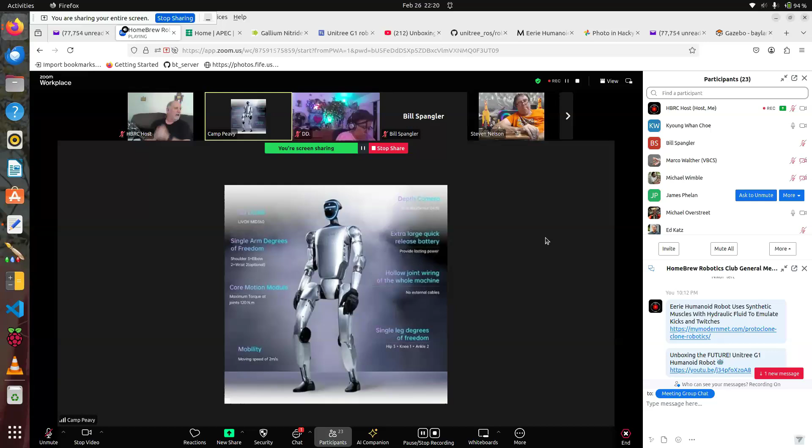All right, what else? What other club news do we have this evening? Yeah, they don't. Hey Stephen. Okay, let's see what's next.

I think you just gave me a good idea there, Cam. What's that? How about BattleBots, but with sort of replaceable shielding and body parts and stuff like that. So basically an inexpensive version, same kind of idea but without all the cost.

Did that? Well, I figured out with BattleBots, getting robots to interact with each other is difficult. The easiest thing to do if you're going to have a contest where robots interact is just have them try to smash the hell out of each other. But even then, and I don't mean to dismiss it, BattleBots is radio control, so there is that. But anyways, we won't have that argument here, because normally the argument for how to make it cheaper is just smaller.

Yeah, that's a good point. The majority of the cost of hosting RoboGames was the combat arena for the most part, wasn't it? The insurance because of all the combat robots, right? Yes, it was. But the combat bots was what drew the crowd. Yeah. But my point is, if we had a Nerf version of that, most of that would go away.

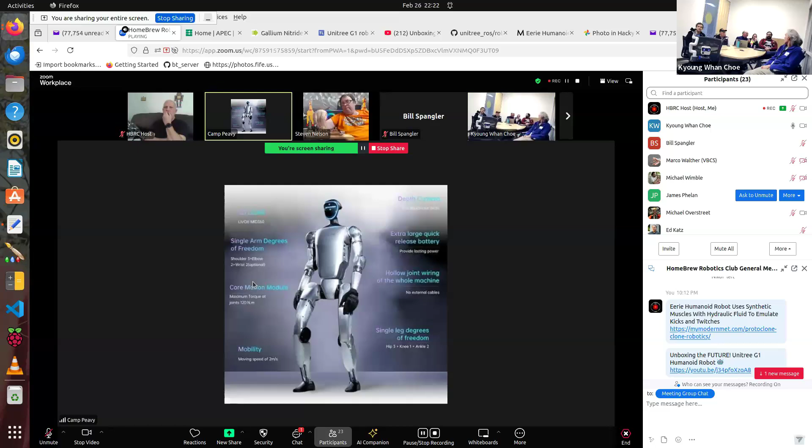There's actually, well, okay, a Nerf version of the big ones. Sure. One of the competitions I really enjoyed watching at RoboGames the last years was, I think the group hosting it was from Arizona, but they were doing like biped mech warrior combat, and it's all airsoft guns. So they don't actually break each other. Yeah, paintballs. Yeah, sure, larger size paintball. That was actually pretty cool with the first-person views and all the things they had going on with that.

It was really cool. And then basically the event organizer provides the target pads to handle the scoring. They mount the destructible combat targets all over the robot, and that's what scores the system. And then the only thing explicitly defined is a radio link to say 'you are destroyed, shut down. You are destroyed.'

Well, it was some kind of miniature city street, wasn't it? Yeah, it was like a town. Yeah, a little cityscape. You basically get bonus points for actually being a humanoid, versus you're allowed to be either a quadruped or a humanoid, and I think you get some kind of multiplier for only having 2 legs. And then you just see the ones that are quite, they just walk up and push over the humanoid.

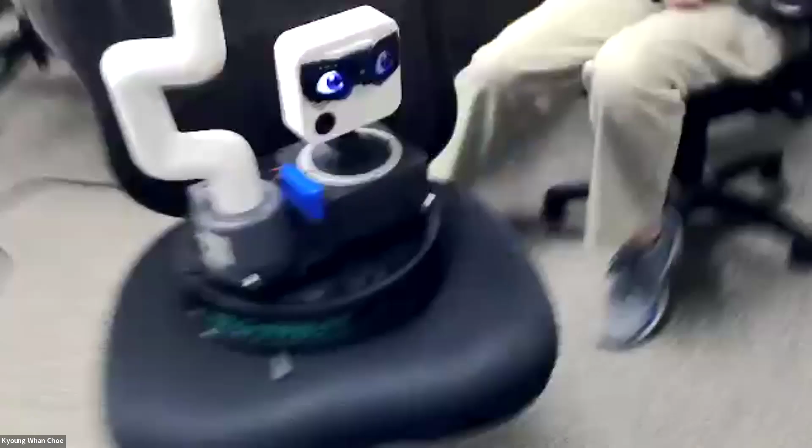This is the front. Yeah, so it's a HackerBot with everything on it - head, Raspberry Pi here, and the Elephant myCobot arm with a custom gripper made by Hackerbot Industries.

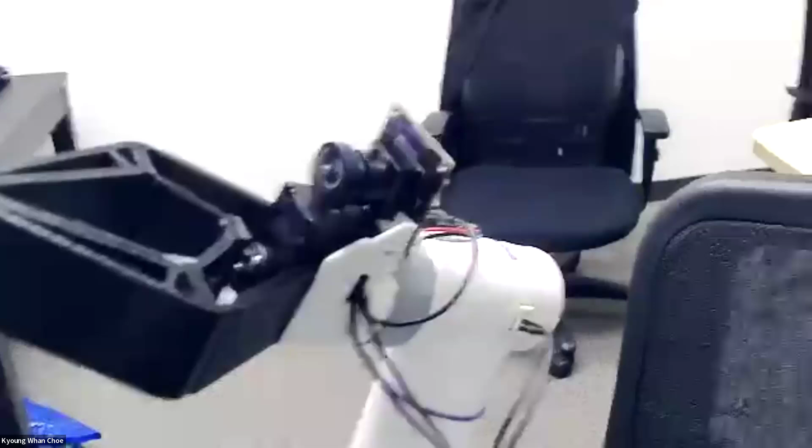I just put together the gripper yesterday, so right now I only tried sending commands through serial, which they have, but there's no middleware yet like ROS and others. So it's pretty much bare bones, but the components seem to be working, except for a few UX problems like powering off and so forth. But it's pretty interesting in a way - it moves, has LiDAR, has mapping, and can dock.

So does that have the AI hat? It does not. Is it a Raspberry Pi 5 in there? Yeah, it's a Raspberry Pi inside. Is it a Raspberry Pi 5? Yes. Okay, and you're running Raspbian?

The default one, I guess - probably Raspbian. And I also suggested to Ian that it would be good to try a Jetson, like Orin Super. Then, because now ROS is also taking advantage of CUDA and so forth, probably a lot of the recent new GPU-accelerated ROS packages can be easily used.

So that's got a shelf on it, doesn't it? Put the camera where the LiDAR is so we can see the LiDAR. Yeah, make it okay. So you've got a shelf on there, raised up a bit, so you could put things on that shelf and it doesn't impede the LiDAR.

You know, iRobot seems to have stopped selling the Create 3. And the BotVac's getting long in the tooth, although you can still get those through eBay for like 150 bucks refurbished. But this guy, with that little shelf on it, is nice because it doesn't block the LiDAR. Yeah, really excited about Rossifying this thing.

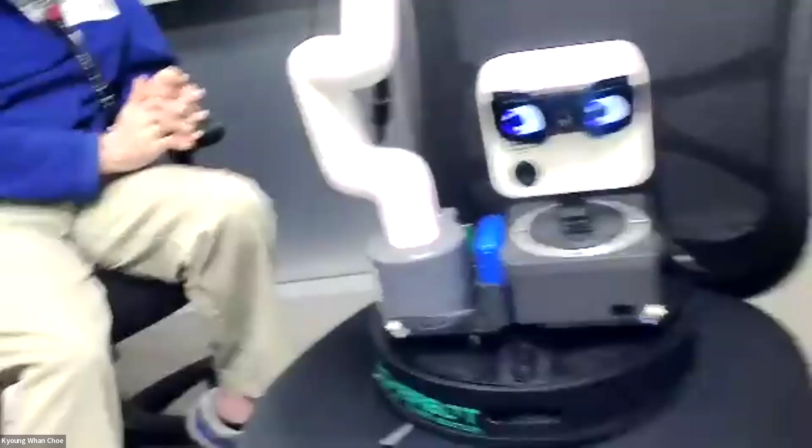Those eyes are very cute. That is still vacuum, yes. So my son tried to put this on, and you see this like the feet, and I said hell no, because then it will get dirty.

Technically the vacuum base, the HackerBot guys did not touch, because anything you modify on an existing vacuum adds cost. So that's a working vacuum, the cheapest one with a lot of sensors and all the software already. Having worked at Neato for 13 years, I can tell you it's actually a damn good robot vacuum cleaner. Just saying.

I thought if you don't vacuum, the battery can last for 10 hours ish. Because when vacuuming with all the motors on, it can only vacuum for an hour or two. Without that heavy duty work, it will last much longer. So that's actually a very good base to begin with, and if you put nice things on top like a Raspberry Pi or a Jetson, and then arms, that's a pretty good mobile base.

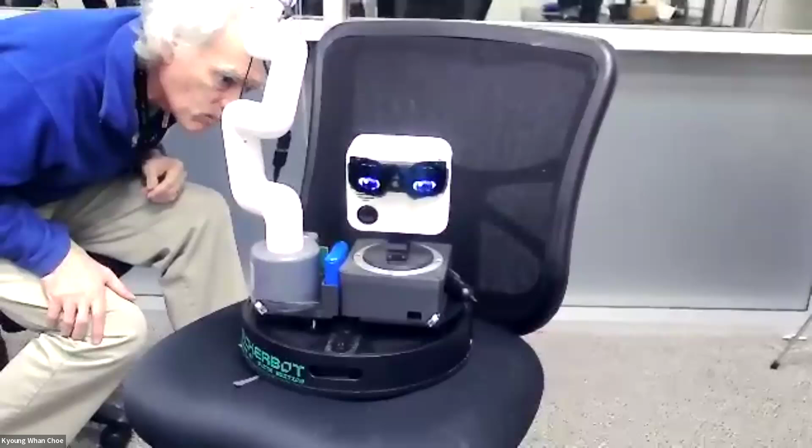What I've observed is there are Arduino and AI guys, a lot of AI going on there, which is interesting because I think there should be some kind of crossover between ROS and AI. That's where a Jetson Orin Nano can add many interesting things as well, and it can also fit in this space - the form factor is almost the same as a Raspberry Pi.

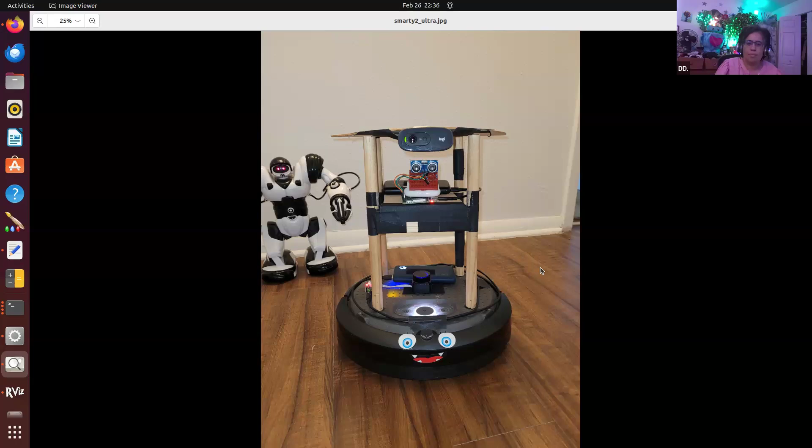All right, this is Smarty 2, part of the Smarty gang, based on the Create 3, LD06 LiDAR, Logitech C270 camera, and a homebrewed ultrasonic sensor. Thanks to Mike Wimble and Ralph Ganock.

So here I've got the robot located in the hallway. I shall attempt the Floorbot Challenge Phase 1. I'm going to do it with waypoints, so let me set some waypoints. Phase 1 of the Floorbot Challenge is to go from one end of the room to the other and back. Phase 2 is to identify an object in the room, and phase 3 is to fetch the object. I think we've had 2 or 3 people do phase 3.

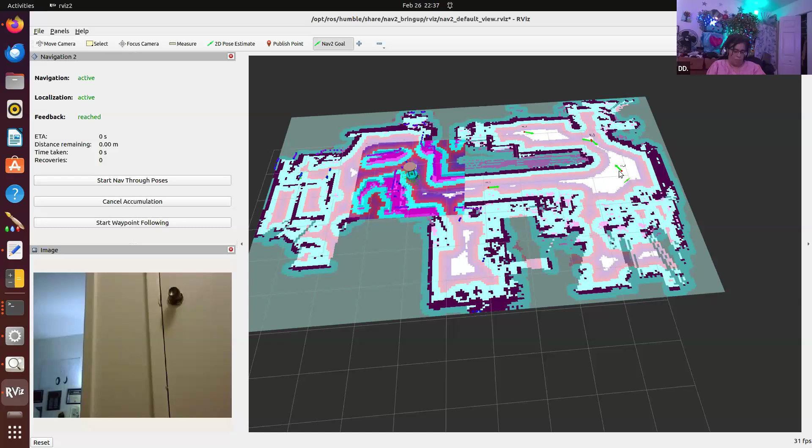Patrick Goebel, among others. So let me put these breadcrumbs here, and with any luck the robot shall navigate from one end of the room to the other.

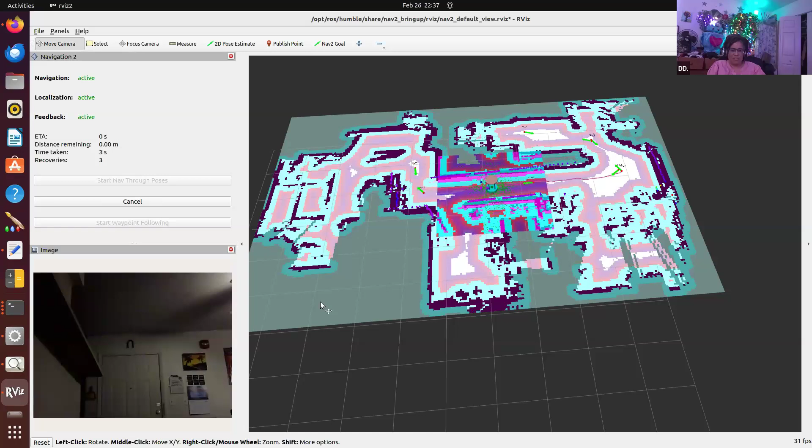So exciting. This is some stuff that we do at the ROS discussion group. If you're interested in ROS, expert or beginner, join in. This is the standard framework for robotics - there is no learning curve, it's a learning cliff.

So this is the ROS visualizer here, the robot's navigating around. This is a MockBot URDF, Unified Robot Description Format, that we've created. Some of us are working on a book called MockBot - we're building the TurtleBot, Mock TurtleBot, 27 different ways, with like 3 different bases, 3 different LiDARs, and 3 different cameras. We're trying to beat Mike Wimble in publishing our book - that's our goal.

So you're saying it's as easy as falling off a cliff, huh? Yeah, it's that easy, it's just that easy. So here he comes, he's on his way back now. It's kind of exciting, this is navigating.

Oh, the thing here is this is actually running off my phone network. So I have my phone set up as a hotspot and I'm doing this. That way I'm able to do remote demos.

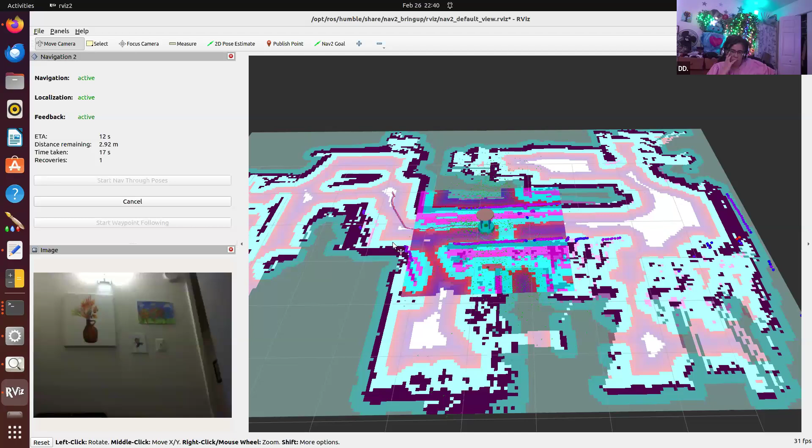Let me reset that endpoint. So that wasn't a complete phase 1, but let's at least let him get home. Yeah, so I've got this one running off of the phone network, and I've got my bot vac running off of the Wi-Fi. And I'll be cobbling together the Roomba using Sergey's code and Ross Lunin documentation. So there he goes. He's at his home now.

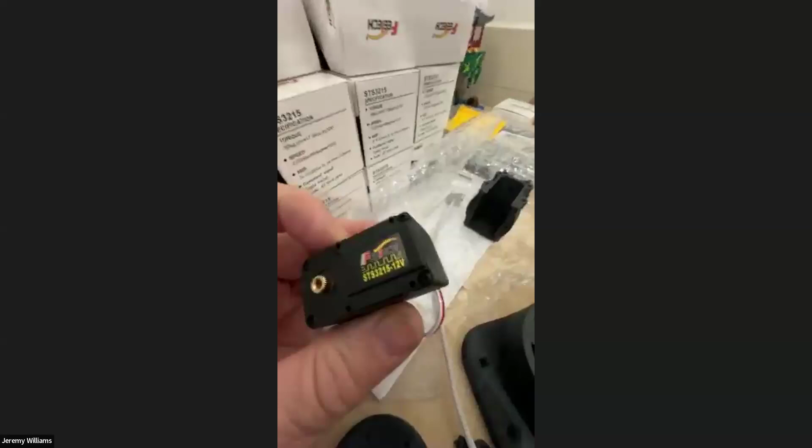It comes with some pretty nice aluminum servo wheels, and most servos have a range of motion. For those of you who are familiar with this, sorry if I'm boring you, but for those that don't, it's actually pretty cool. Most servo motors, as you know, have a range of motion, like, I don't know, 135 degrees or 270 or whatever. This one is a little bit different, a little bit unique. On the box I really should take one of these apart for you guys, but anyway, on the box it kind of shows it.

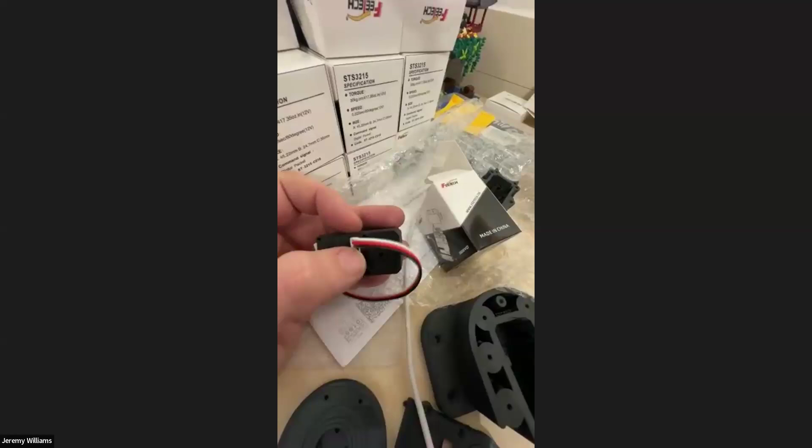What makes this unique is, first of all, it's daisy chainable. So you've got connectors on here where you can connect the signal in. You've got your power and then your signal, so 3 wires, and you can daisy chain it and keep on going. You can do 253 of these.

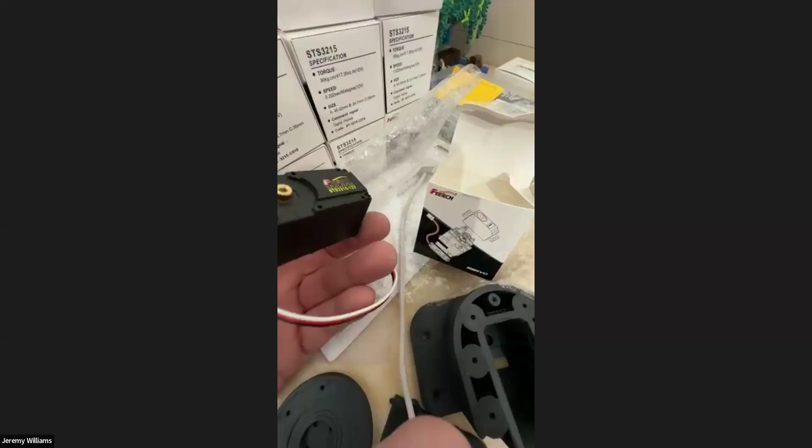I'm sorry Jeremy, are these Dynamixels? Are these Dynamixel servos? These are, if you want to get the brand name, they're Feetech, made by a couple companies I know of. Yeah, I hate to interrupt, but those are actually ripoffs of Robotis servos. Yeah, there's a lot of stuff in China that's a ripoff of a ripoff of a ripoff. So I'm not vouching for necessarily the company, I'm just vouching for the kind of servo it is.

So these will actually rotate, as some of you probably already know, completely 360 degrees. It can also give feedback as far as voltage drop and position. Or are you giving it serial commands? Yeah, and there's actually a little magnet inside and a magnetometer for feedback of position.

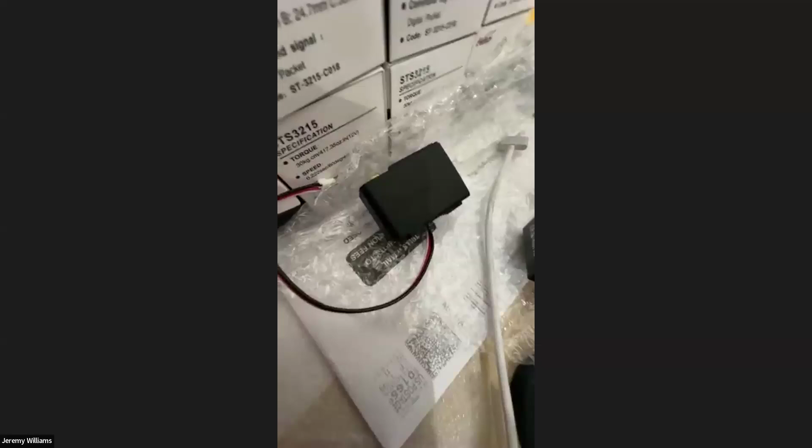So that was the one thing that I thought was really cool, is that for the price point - what did these cost us? I think they cost us about $15 US. Yeah, you probably have to buy 50 at a time, don't you? How did you guess? I know those guys. So we bought about 40 of them. I've got some of their kits too, and what I liked is they've got a little electronic speed control for servos that does the PWM thing. It's like $10, really cheap.

Yeah, and the best part is the fact that you can daisy chain them, so you don't have a whole stack of wires coming in at the bottom. But anyway, I just thought I'd mention that if you haven't seen them. Yeah, I need to replace some of my Darwin servos, they're pretty versatile. Anyway, that's all I got for you. Very cool, thank you, Jeremy.

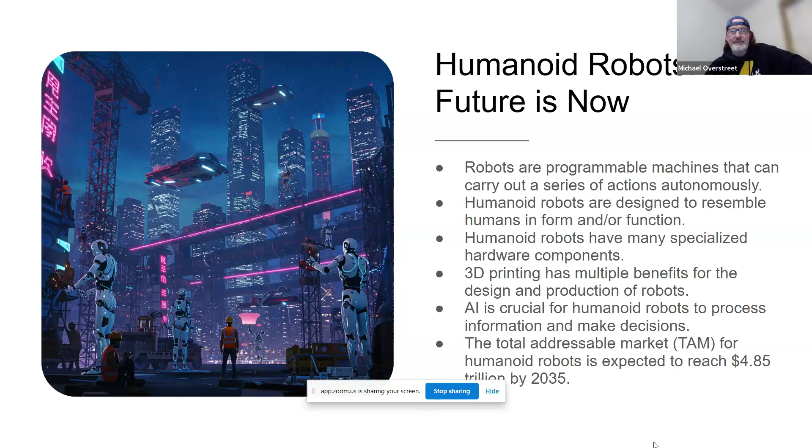Okay, so one of the cool things that RoboGames did for me was that I was able to meet lots of people throughout the world who were really interested in robotics, especially humanoid robots. So one of the cool advantages that RoboGames provided me is I could visit friends throughout the world and check out what they're doing in the field of robotics and so on.

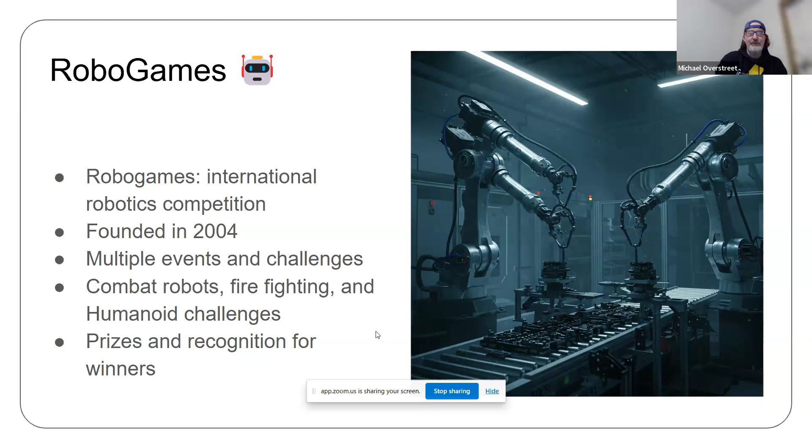So RoboGames, like I said, that got me started back in 2004, 2005, mainly humanoids. Most people, I think, in this group have been to or know a lot about RoboGames, so we don't have to really go into too much detail about RoboGames.

Now, most people, when they think about RoboGames, they think about this. They think about BattleBots. BattleBots is what everybody showed up to see. So,

Just a quick side note, in a lot of ways it is kind of a failure on my part because I'm a huge advocate for humanoid robots, and I was never able to get humanoid robots to be big, especially in the U.S. If you go to places like Japan, especially South Korea, and even some places in China, you've got a big event called Robo-One, and it's huge and very popular. And unfortunately, that never really happened at RoboGames. I think pretty much since 2005, it's been me and maybe 1 or 2 other people in the U.S. So with humanoid robots getting so big now, it's unfortunate that we don't have an event in the U.S. to participate in.

So I'm sure there was humanoid soccer too. Yes, there's all kinds of cool things we did with humanoid robots - humanoid soccer, kung fu. We had a lot of autonomous events: basketball, soccer, kick a soccer ball, shoot a basketball, dash, you name it. We had lots of really cool humanoid events, both autonomous and RC. Of course, kung fu - everybody loved kung fu, especially with the big 5 kilogram and higher robots, weight classes. But like I said, it's partially a failing on my part because I was heavily involved in humanoid robots at RoboGames, and we just never could get that exposure.

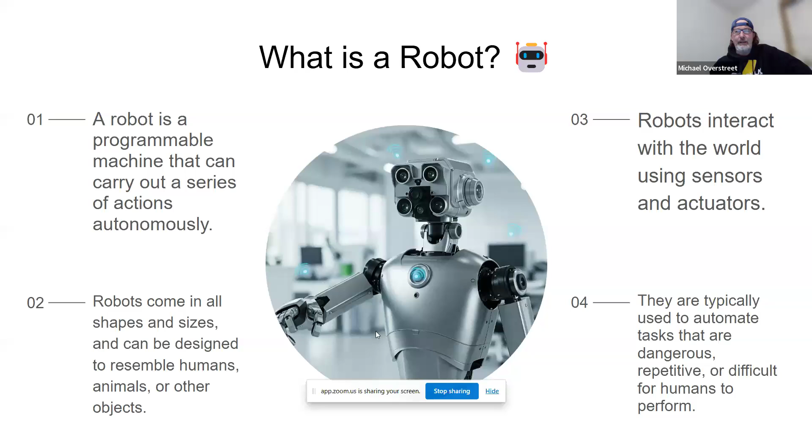So humanoid robots, it's kind of both those very strict as far as 2 legs and 2 arms. People say 2 legs, 2 arms, just looks just like us. But you can tell nowadays there's all kinds of variations on the human form, very similar, but just slight variations.

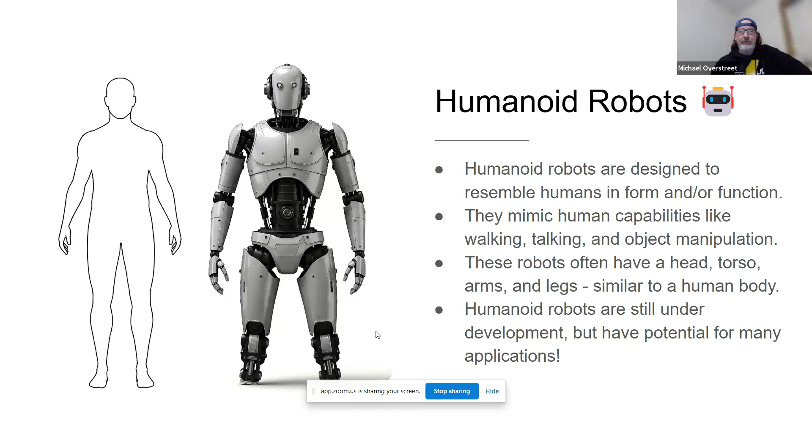And of course, everybody seems to be trying to develop a humanoid robot right now. I think the big point of my talk tonight is that as humanoid robots have been becoming more and more popular, everybody seems to be wanting to develop one. I remember my first RoboGames in 2005, and I had multiple conversations with people there about the basic argument: is function more important than form, or is form more important than function?

It seems that the debate, especially around 2005, everybody was telling me it's the function, it's what the robot does. You design the robot based on what function or activity, what job you want it to do.

Now it seems that popular opinion has flipped. When I have a conversation with somebody, they automatically assume that the best robot would be one that looks like us, because you need the robot to work and perform jobs in the same environment that we live in. So instead of changing our environment, you make the robot just like us.

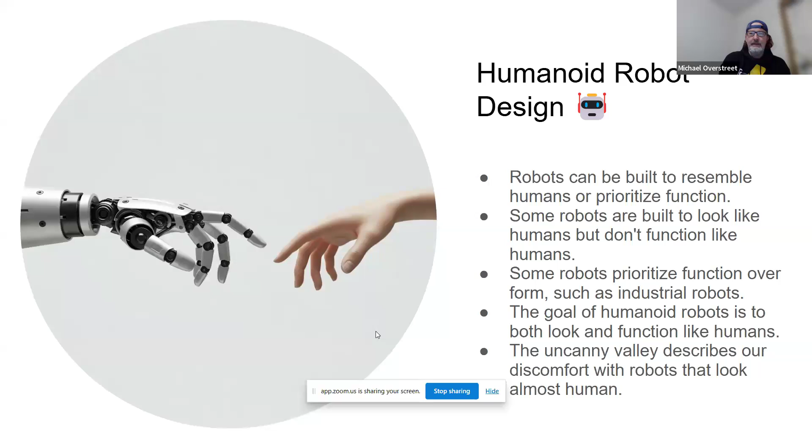I think there should still be some thinking about what is the best design for a situation, because a humanoid robot can be a huge overkill in expense and complexity for a task.

A lot of people think that a biped, which I've experienced, can be very difficult to get to walk and balance. I love Legos, and I have a lot of kids that I teach who love Legos. I just think, how would a bipedal robot walking around on a floor full of Legos, how well is it going to walk? You really don't want a humanoid robot to fall on somebody. So these are design considerations I think people need to think about.

You might think, well, you're supposed to be promoting humanoid robots - but yes, I think we still have to be smart, and we need to look at the applications and what function the robot's going to provide. We need to be efficient and cost effective, is what I'm trying to get at.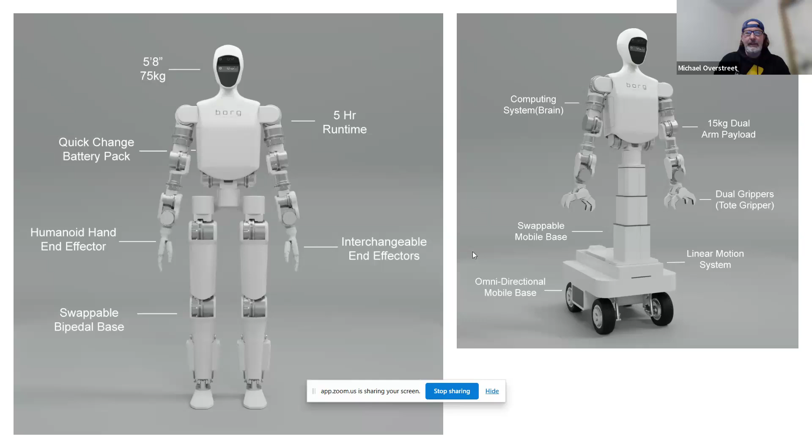I bring up this picture. Everybody should know who this robot is.

I've always thought I should patent this, but I always thought, why limit a humanoid robot to two arms and two hands? I've actually seen some Japanese and Chinese inventors give you an arm attachment to your body, so you have a 3rd or 4th arm. So you shouldn't limit a humanoid robot. Some people would tell me I'm talking blasphemy, but I don't think you should limit a humanoid robot to just 2 arms and 2 hands. There can be added functionality - one humanoid robot could do more than the job of one human being if it had multiple arms and hands. It's just another design consideration.

So the big thing, when Asimo, the Honda robot, came out - it's been years now. I think it's finally been retired about 4 or 5 years ago.

The hardware was the big stumbling block for years and years, figuring out how we can get a robot to balance and walk on two legs and be smooth and natural. So whenever you talk about a humanoid robot, I always like to tell people that actuators are extremely important. Actuators are going to make or break your robot. With a humanoid robot, you need high torque, but you also need some speed, you need that balance. Usually that means you're going to have a very expensive, very complicated, very complex actuator, or you call them servos, actuators, whatever you want to call them. I've heard it called different things.

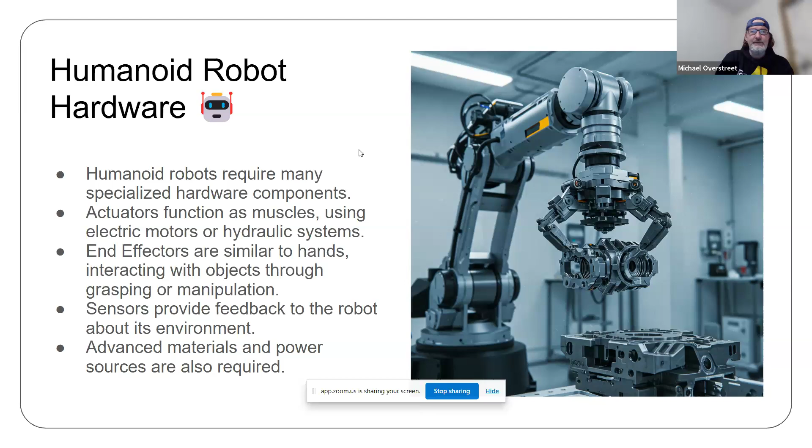Now with the hardware, I still don't think we're quite there yet. One of the most important pieces of the hardware, I mean walking is important, having the legs is important, but one of the most important pieces of hardware is the hands.

Because if the humanoid robot can't pick anything up, can't have some little bit of dexterity... I'm sure everybody's seen the news about humanoid robots in factories and so on. They've got to be able to do something that is a viable job, and since they're in a humanoid environment, they need to pick up tools or pick up objects or press buttons or press levers and do all those kinds of stuff.

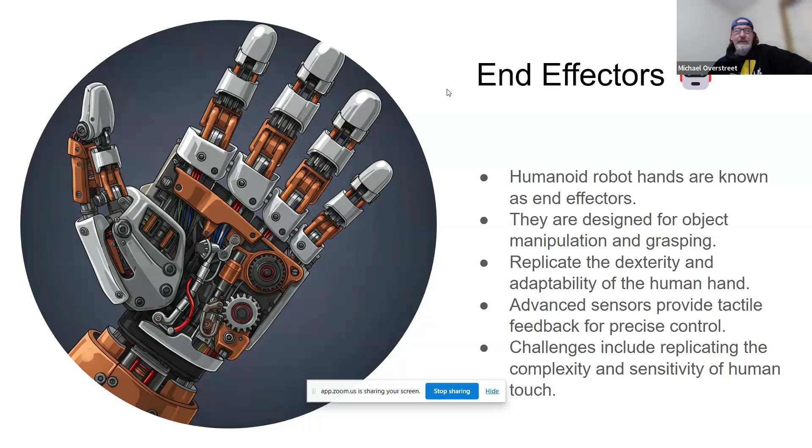You're going to need a very effective hand. I know there's been a lot of work and development in the last 20, 30 years on that. I think we're getting very close to having very dexterous, very agile hands, but I still think there's going to be a lot of work yet to do on that. We'll see how that comes in the future.

I'm not really going to single out one robot or one robot company because there's so many. Of course, everybody knows Tesla, and Tesla's developing and working on their Optimus robot. They've got a third generation hand. I'm not 100% sure this is the third generation, but it's very close to being their third generation. If you look at the fingers themselves, they have force feedback sensors in there.

One of the cool things about being a STEM teacher is I get to talk to high school students, and sometimes they come up with some of the most interesting ideas that if you're not thinking outside of the box you wouldn't think about as an engineer. I've had a few of my high school students ask me, do you really need four fingers? I mean, yes, you probably need an opposable thumb if you're trying to pick something up, but do you really need four fingers? Can you get by with three fingers or two fingers? The reason I mention that is because adding fingers is adding cost and complexity to a robot hand.

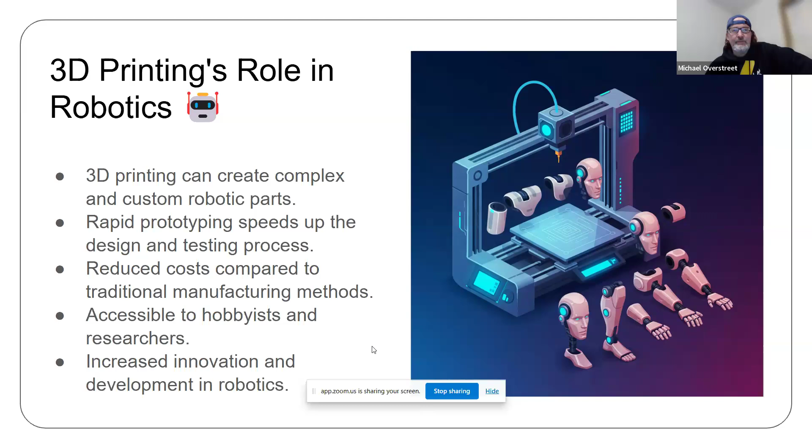Now, batteries. So actuators, I think, are going to be a huge issue for a lot of companies trying to develop a humanoid robot. But I think the next, probably not most important, but one of the 1A, 1B kind of thing is batteries.

So there's a lot of people on social media. You can tell they're not engineers, you can tell they're business people, accountants, futurists, influencers, always talking about how humanoid robots can work 24 hours a day, nonstop. One robot can replace 3 workers because you're going to have 3 shifts, and I just laugh. I don't know if battery technology is that sophisticated right now to have a 24-hour humanoid robot battery. You'd have to have a gigantic battery.

One of the funny stories my students like me to tell is when you watch the Terminator movies, you got Arnold Schwarzenegger running around, beating people up, fighting constantly. I just keep thinking, if that was today, the Terminator robot's batteries would be drained in like 2 or 3 hours. So if you're Kyle Reese, all you have to do is just run faster than the Terminator for about 3 or 4 hours, drain the batteries, and keep the Terminator from charging, and then the movie's all over.

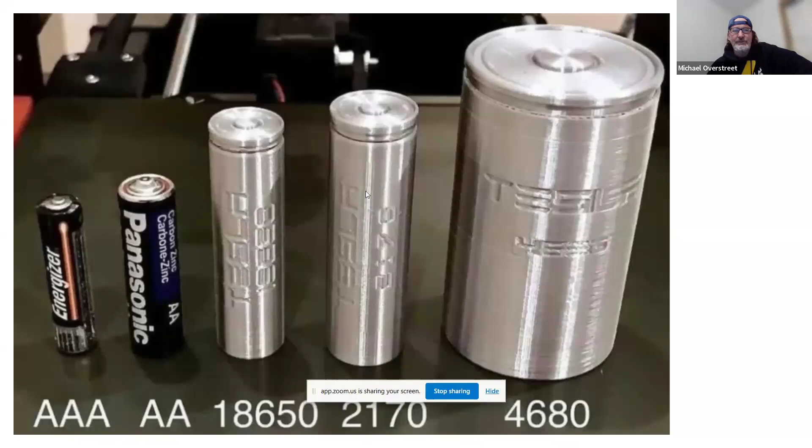So when these business people and influencers are talking about Tesla robots being able to work 8 hours or more, 16, 20 hours a day, I'm like, I need to see that before I believe that. Okay, I'm looking at the battery life, it says about 2 hours. But to your point, is that 2 hours of sitting in a wheelchair or running around?

Doing parkour. Yeah, right. And a lot of people saying they want humanoid robots in the factories to pick up heavy objects and carry them from one station to the next. So the battery's not going to last that long.

So the other thing I keep hearing online, people talk about, oh whoops, how do I go backwards. You'd have to have a charger at your workstation, so they walk to one workstation, plug themselves in, do a couple tasks, then unplug and go to another workstation. You could have the charger in the floor wirelessly.

It's not just a humanoid robot that... hopefully my screen comes back. It's not just a humanoid robot. Oh, God. The robots just put their hands up and get wirelessly charged up.

Well, because if we're talking about needing to put wireless charging pads in the floor, right, you've just broken the principle that they're working in the same environment as you are. Now you've modified the work environment to support the robot. Although it might not be a bad modification. But if you're going to modify it, as Mike said, you've decided to modify, so is the humanoid still the best answer if you're going to modify the environment anyway?

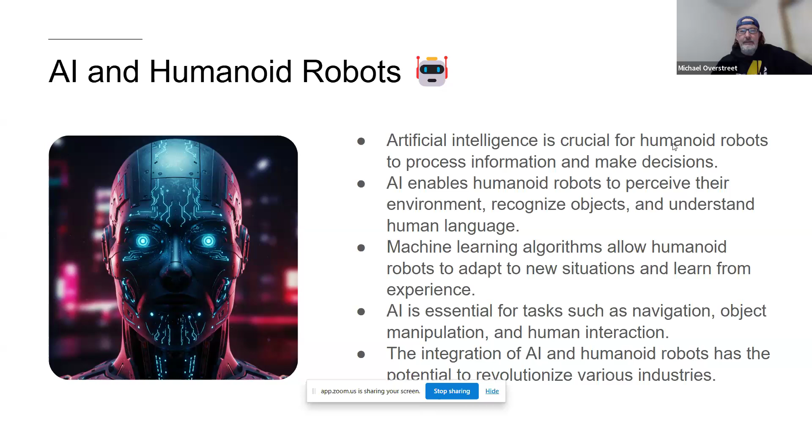So it has a group of basic functions that it can apply to whatever situation you put it in. Right, exactly. Now, but I've also heard that they're having some issues with large language models.

So if you ask a large language model, I need to go to Japan for a maker fair, how do I get there? Sometimes large language models have a hard time breaking all the steps down you need. This is a common reproduced result from the 'LLMs can't plan' genre of papers. They don't do well on repetitive tasks because it's essentially talking to itself over and over again, and that really increases the chance of a hallucination. You have like a 10% chance of a hallucination each step, and then you have 20 steps, or 10 steps, now you have like a 70% chance of hallucination.

For robotics, what people have been looking for is more vision language action models. Right now, one of the state-of-the-art ones that just got open sourced is the physical intelligence model, which is now open, so you can just download it. There's also a new paper called Scaling Laws for Robot Data for Imitation Learning or something of that nature. All those papers show you what the scaling laws are.

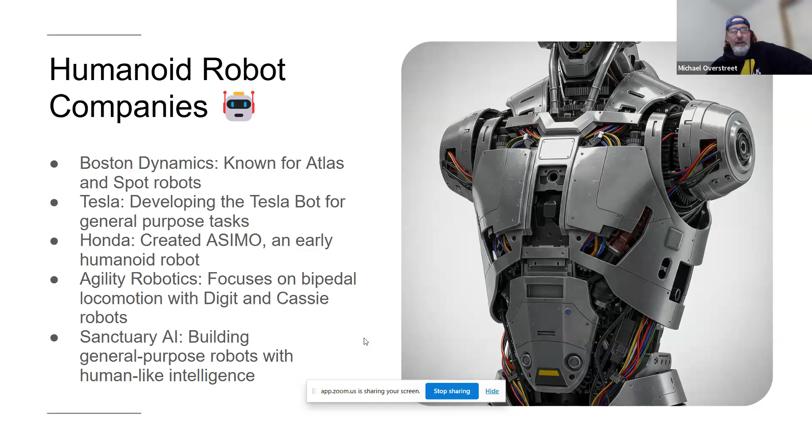I also hear this all the time from influencers, people on YouTube talking about the TAM, a business term for total addressable market. I really don't care about this, but I want to talk about how everybody in the last year or so has been talking about the huge market for humanoid robots. Musk has even said he thinks there will be at least one humanoid robot per person in the world, and some people say eventually there could be 2 or 3 or more humanoid robots for every one person. So I wonder what the car to people ratio is. Who's going to fix all of these things?

You are, Stephen. No, I retired. I'm done. Yeah, I mean...

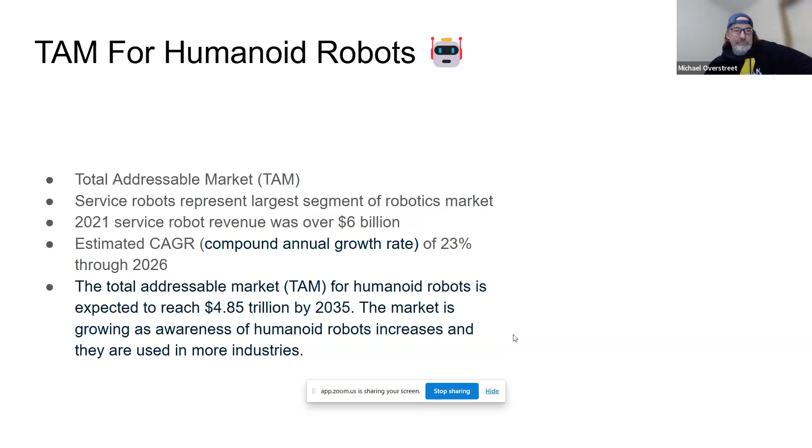There's plenty of people in this world that don't even have electricity, but that's another thing. I just think it's interesting because I keep hearing people say there's going to be 2 or 3 humanoid robots per person, so there'll be billions and companies will be astronomical. In the United States there are 811 cars per 1,000 people. How many of them run? Almost 1-to-1. So there's a possibility that in 10, 15, 20 years from now there could be one humanoid robot per person in the world. I would love to have a humanoid robot butler myself.

And so this is another slide that I just put in for informational purposes.

I heard so many arguments online about how much humanoid robots are going to cost. I know Musk has thrown around the $20,000 cost, and to me that's unbelievable. As an engineer, I don't know how many meetings I've been in where you have the business people and vice presidents talking to a client, and all of a sudden they're throwing out these really low ball costs to do things, and the engineers are just staring at each other going, how are we ever going to do this at that cost? And it's the same with the humanoid robots.

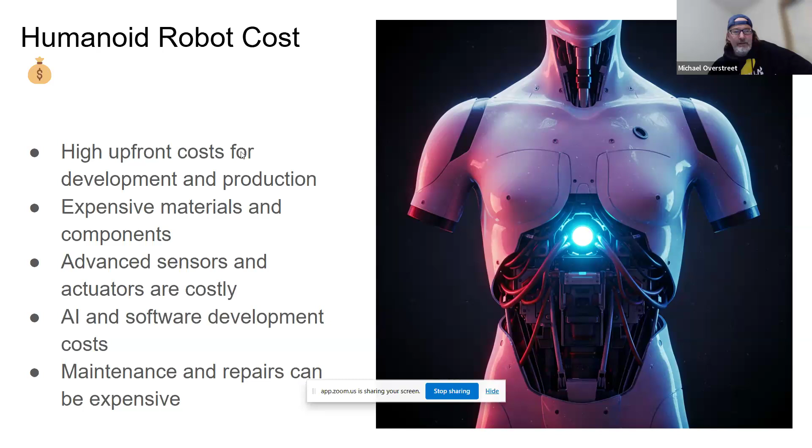So I can send out the link—a couple of investment companies. I'm only including this because it's interesting, but to me this is not as important as some of the other aspects of what a humanoid robot is. But when you try to do a cost breakdown and figure out how much a humanoid robot would cost, I can't even fathom how you could get a $20,000 humanoid robot and sell it and make any money.

I know Unitree—their base simple humanoid robot that Camp had in that video is like 16,000. But that's the base, the simple one without hands. It's 21,000 if you want it delivered.

I wish I had 20,000. We'll bring it to you—write a check for 21,000 and we'll get you one. Actually, you can put as much as you want into these things; that's the beginning model, it's only remote control. The state of the art with the Jetson Nano is like $65,000. That's an expensive Jetson Nano. I mean, it's really easy to make a small fortune in robotics—just start with a large one. That's always been that way.

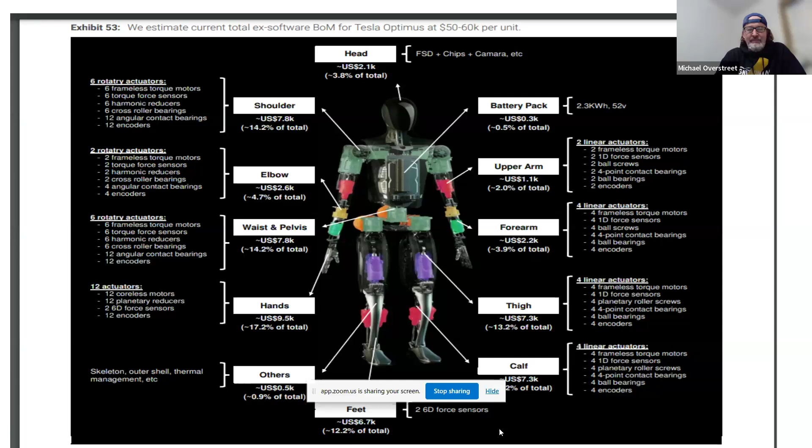The dolls, sorry. Yeah, no, that's fine. We could do a question and answer and talk about stuff.

Kind of wrapping up, I think I only have a few more slides, but the big thing they're talking about is humanoid robots in factories. This is where I don't know how you could do 24/7 with just one humanoid robot. You're going to need multiples. Everybody keeps talking about how it's going to reduce labor costs. I'm sure in the future it will. Of course, humans can get sick and injured, and humans get tired and don't perform as well. Sometimes after a long shift, a human won't be as precise, delicate, or efficient as a robot. But do you really need a humanoid robot to do manufacturing? I think that's a valid question to ask.

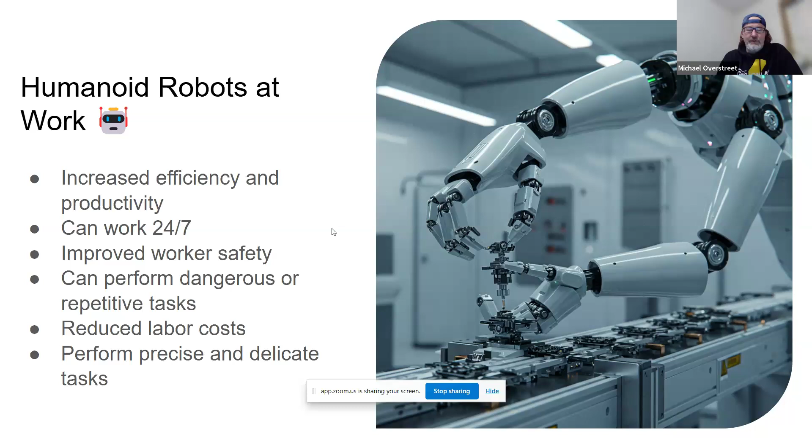And then you have humanoid robots in the home. A lot of companies like Figure AI and some others are talking about how this is what they want to do. This is going to be very hard, because your robots have to be extremely safe. You don't want a humanoid robot accidentally kicking or crushing a small dog or even a little baby. There's all kinds of safety problems you're going to have with humanoid robots in the home. You're going to have to prove that a humanoid robot can interact without crushing, breaking, or hurting things. But the possibilities are huge. Like I said, we get back to one humanoid robot per person - this is where that's going to happen. But you also have to consider all the complications and issues.

This is where the promise of a humanoid robot lies, because it will be just like us. It could walk around in a home, walk upstairs, and interact with all the equipment and appliances in a home. But we just have to weigh the balance of the good and the bad with humanoid robots in the home.

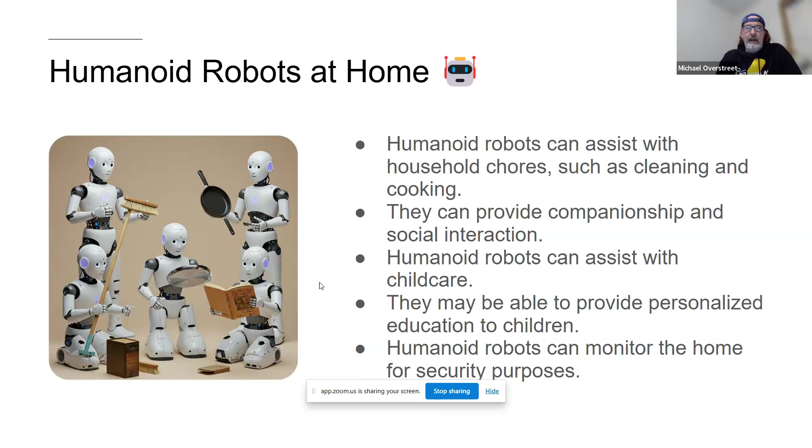If you're interested in doing a lot of investing, it's unbelievable how many different companies are out there with some involvement in software, hardware, sensors, actuators. But again, to me, this is where the complexity of humanoid robots is such that there's huge promise, but I'm sure there's going to be mountains and valleys and all kinds of interesting detours and potholes that happen over the next 5, 10, 15 years.

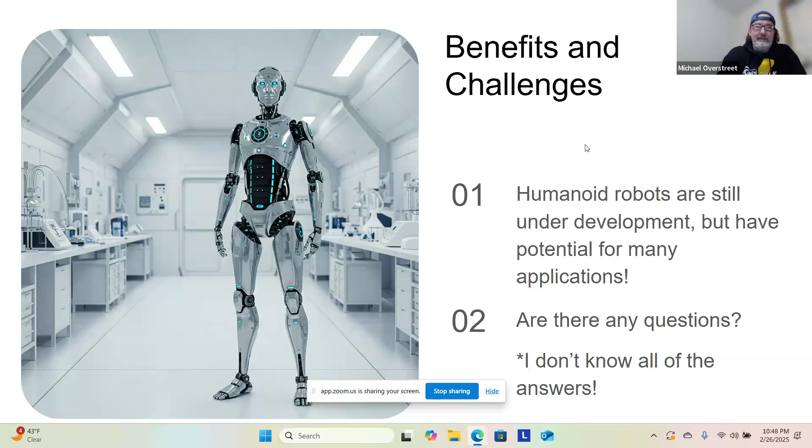Thank you, is that you, one of your students Michael? Is that a student there? Oh no, that's another AI, little AI generated picture.

Questions? I probably bored everybody, but I think I just scratched the surface of all the detail and all the different things going on with humanoid robots.

Have you heard of Groot? NVIDIA's Groot? Yes, but I don't know a lot about it. I'm constantly bombarded with, at least in my social media feeds, the latest greatest humanoid robot software and AI. Probably should ask Dee Dee this, but what about InMoov? Where's InMoov these days?

Still building, 3D printing and stuff like that. It's been around for quite a while, they've updated it. The latest version has a silicone face like a Sophia, but it's not quite there. I saw him at the Maker Faire. I mean, you have the hardware, but it's the software, right? That's the big critical piece. And the accuracy, we're just using kind of hobby servos, so there's an accuracy concern I would have.